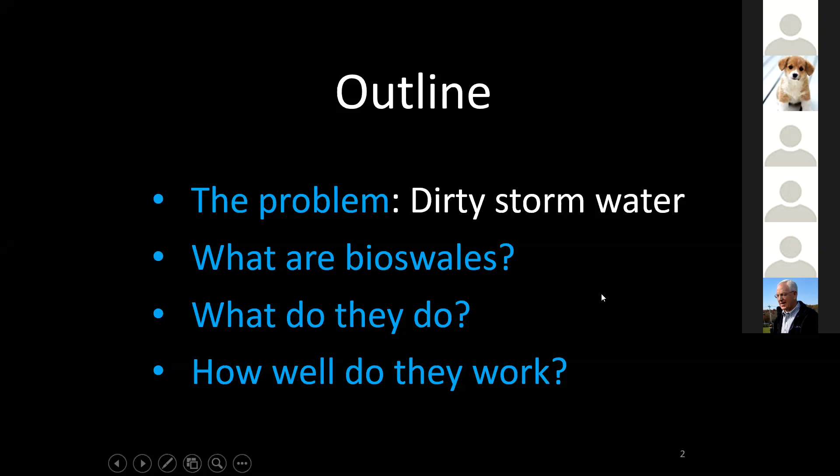Here's what we're going to be talking about today. 4 things. One is I'm going to outline the problem a little bit, and it's pretty simple. It's that we have a lot of dirty stormwater, but I'll tell you a little bit about the background of that. And then we're going to be talking about bioswales, and I think once I show you a picture, you'll realize that you've seen them around town. Matt's been building them everywhere, but I want to dig into that a little bit, and then tell you also about what it is that they do. They're not just beautiful gardens, they actually have an important function.

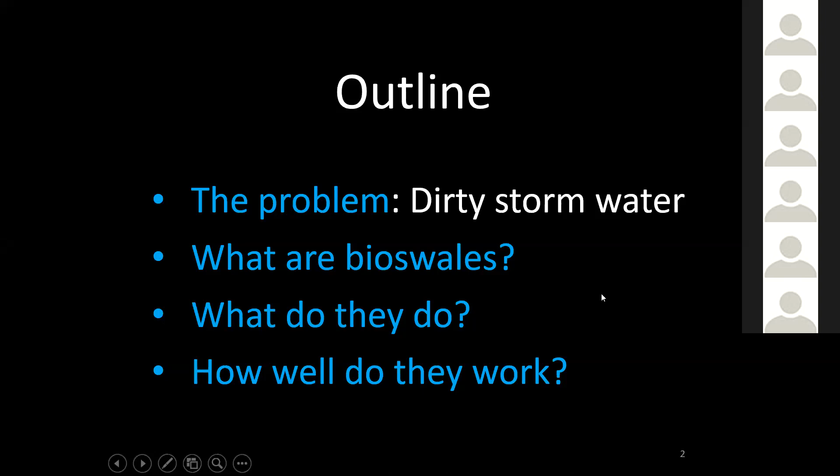And then I'll finish up with the research that I've been doing, which is to try to figure out how well they work. We kind of assume that they work, but it's good to know that for sure and put numbers on it. So the problem, here's images of, on the left you see kind of an undeveloped area, forest. If you have a building, it's got a green roof, and when it rains, water behaves the way that it likes to in forested systems, which is that it filters into the ground.

And some of it also evaporates either passively or by the actions of plants up into the sky. And so most of the water is being dealt with through these natural pathways. In a city, you have a system of pipes and catch basins and things. That's called gray infrastructure. I'll show you some more about that later.

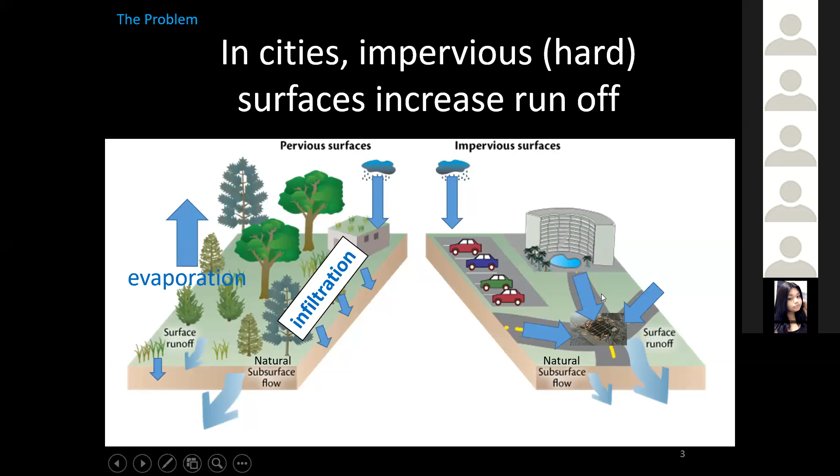And the water runs off those hard surfaces, roads, roofs, parking lots, sidewalks, all that stuff, and it goes down into the subsurface where we don't see it anymore, but it's down there. And I'll talk about that in a minute as well. And the outcome is that in a kind of a natural, undeveloped, more rural system, most of the water is getting into the groundwater system and receives natural treatment. I'll bring us to that point too.

Whereas in a city, most of it, before we had these bioswales, is going into a series of pipes underground, and then it flows very quickly into the nearest water body, okay? And usually receiving essentially no treatment at all. So we're just taking that dirty water off the streets, and it's going into nearby streams and rivers.

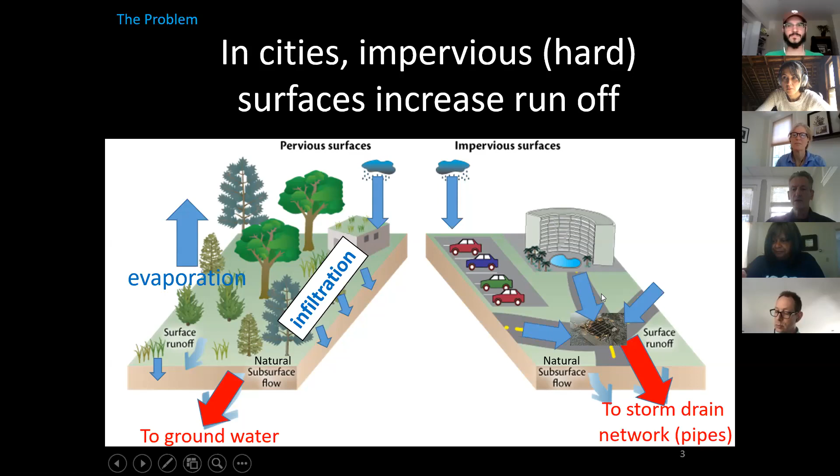And along the way, as it's flowing over these hard surfaces, it picks up all sorts of chemicals that you may not be thinking about very much, but they're there. So people add pesticides and fertilizers to their lawns. Out in the road, they salt, and that's a picture I took this winter. That's a heap of salt there in the middle. It's almost like one of those speed bumps.

It was so big. Or in parking lots and gas stations and so forth, things drip off of cars and you get all that oil. And when the rain comes, it washes all of that crud down into the storm drain network and into your nearest favorite stream or pond. That's not good.

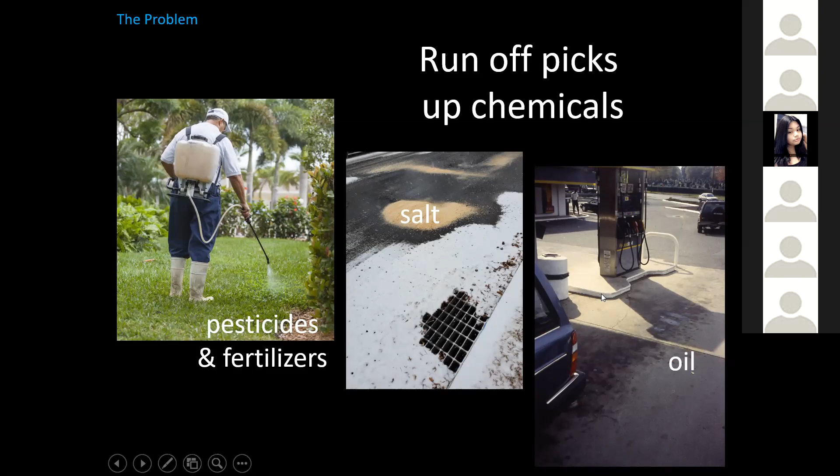So you've seen these catch basins all over the city. They don't go nowhere. They go actually to a set of pipes, as I mentioned. And we can't see those pipes, which is intentional, but it's also bad in the sense that it makes us kind of unaware of the problem. We feel water goes into that catch basin and it's gone, but it's not.

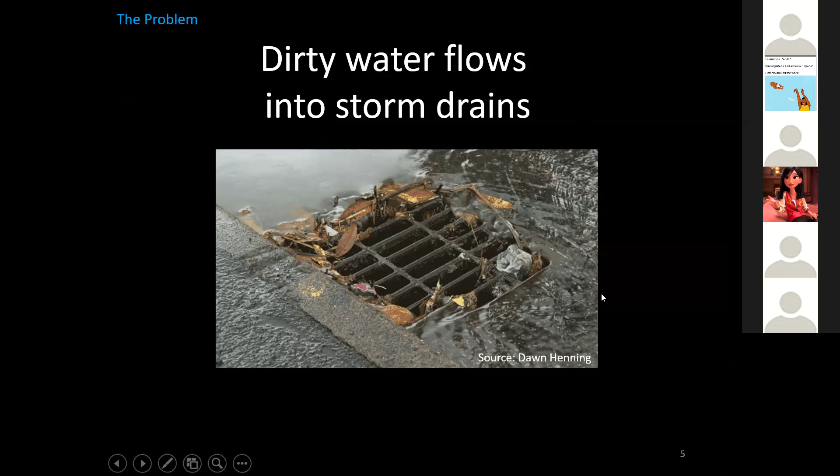Indeed, it's flowing to some nearby originally clean water body, and this is a picture of a research site of one of my doctoral students a few years ago. I don't know if it's crystal clear, but the water that's coming towards us from upstream underneath that bridge is clear, and then the water coming out of the pipe, out of the storm drain network, is really filthy, and you can just see it.

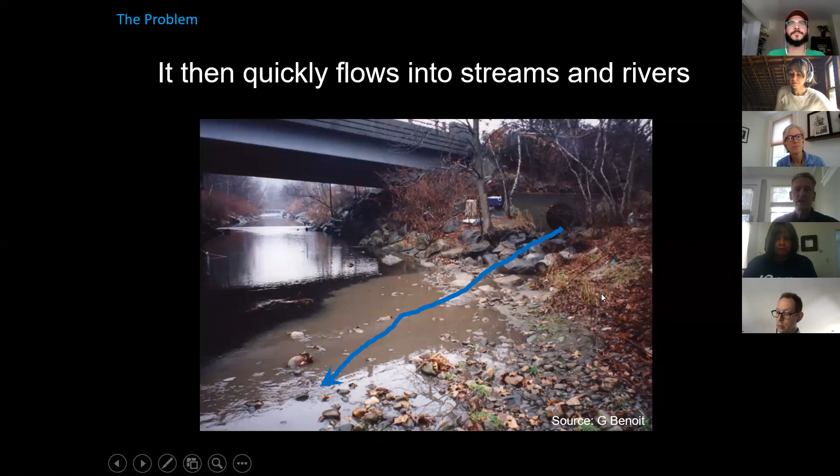It's that brown mess, and that brown is not just soil dirt particles, it's also carrying a lot of those chemicals that I showed you in the previous slide, so that's not a good thing. And that, believe it or not, that's the best case, okay? So the set of pipes under the city can come in two different varieties.

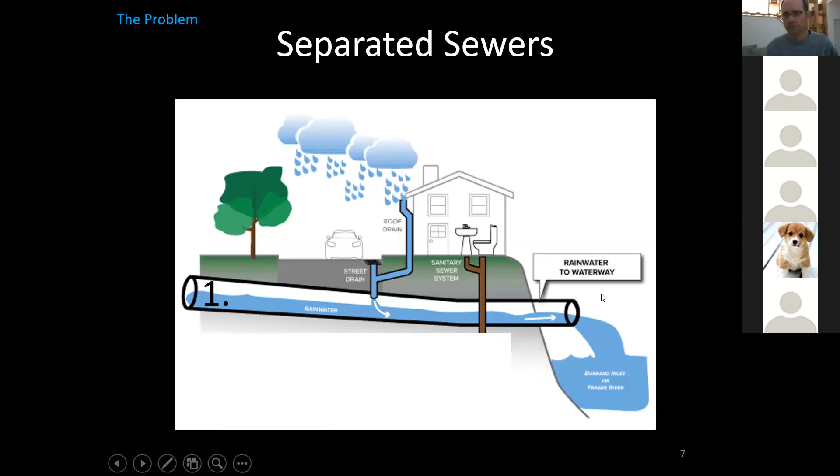One is so-called separated sewers, and you'll see I have the number 1 there indicating a single pipe. And water from the streets, on the left there, the blue water is flowing into that pipe, and then it's going into the nearby water body, but it's picked up chemicals, so maybe it shouldn't be blue, maybe it should be brown. But then so there's the flow.

But then there's this other set of pipes that we have, so that sewage coming from houses, toilets, sinks, washing machines, and so forth, goes to the sewage treatment plant where it gets treated, fortunately. And this is the way that modern cities are built, and the newer parts of the city of New Haven.

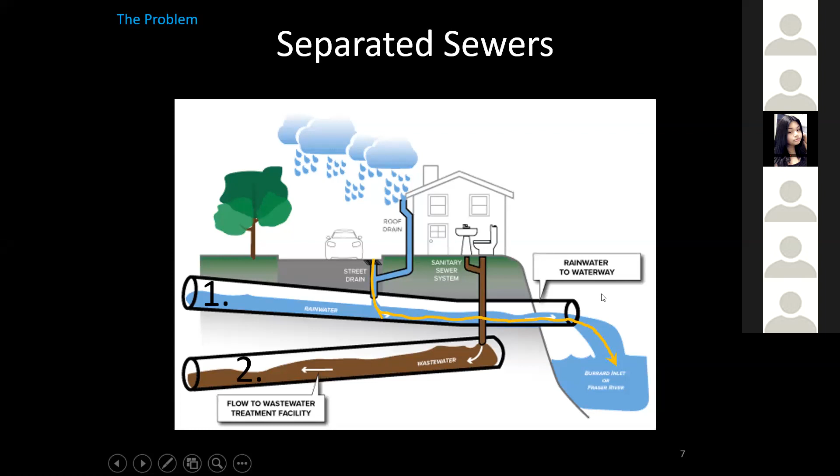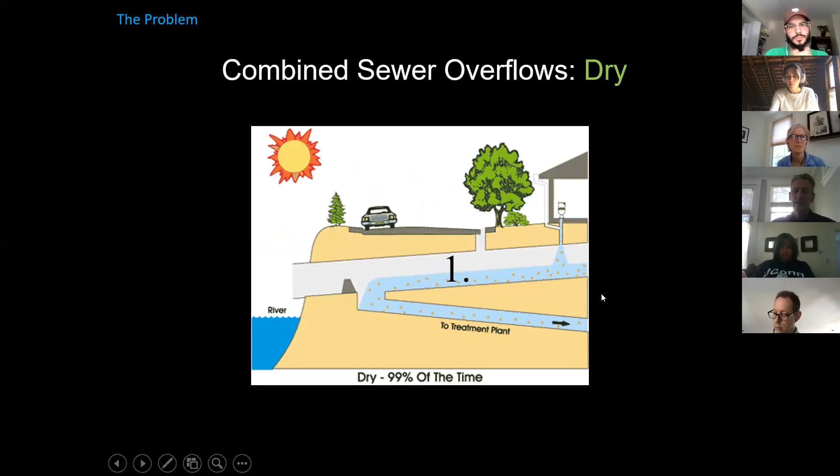But older cities and older parts of cities tend to have a single pipe, one big pipe, and it's receiving water. Here, the sun's out, it's dry conditions, there's no rain. And all of the water from the house is going, fortunately, to the sewage treatment plant. However, then it rains. There's the water going to the sewage treatment plant.

Then it rains, and the water that comes off the street goes into the catch basin, flows down into that same pipe as the raw sewage. And that mixture of those two things exceeds the capacity of the pipe system and of the sewage treatment plant.

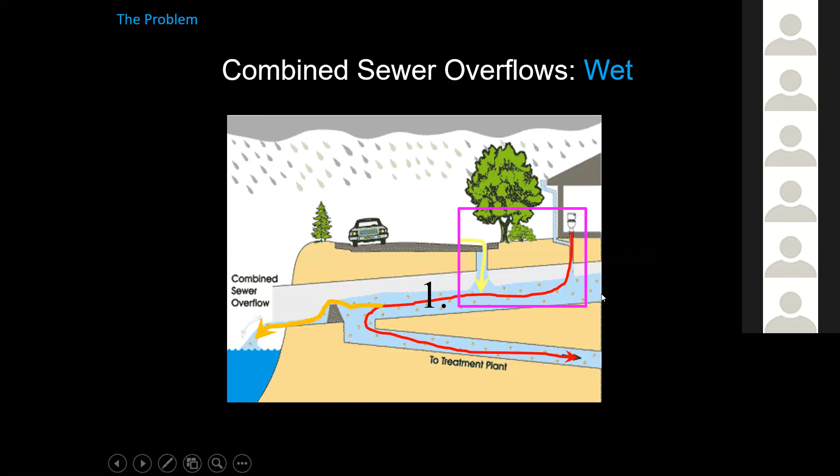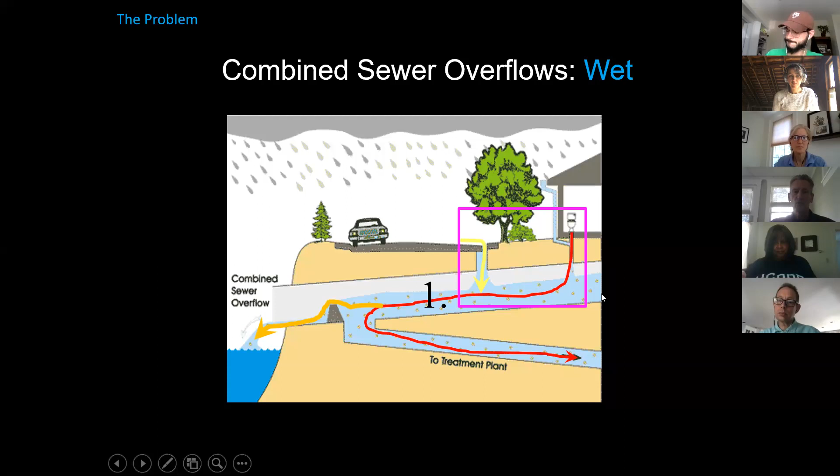And that mixture of raw sewage and street runoff, neither of which is clean, is going into nearby water bodies. And that's the worst possible scenario. In either case, the dirty water from the street can end up in otherwise clean receiving water bodies. And obviously that's something that we don't want.

So that's the problem. Let's talk a little bit about what bioswales are, and that gets into a bigger question of so-called green versus gray infrastructure. And infrastructure is just the fancy word for the things that we build, and it can include these pipes and things that I've talked about, but infrastructure also includes bridges and roads and all of that stuff as well. But let's stick with the pipes.

So gray infrastructure, and I'm showing you some pictures on the left, is all of this stuff that's underground. All we see is the grates where the water enters, but then you have pipes and chambers, all of this concrete, which is expensive. Expensive to buy it, but it's also, you can imagine, very expensive to install because you have to dig up the street, close the street down in order to put this stuff down there. And eventually it wears out and you have to replace it.

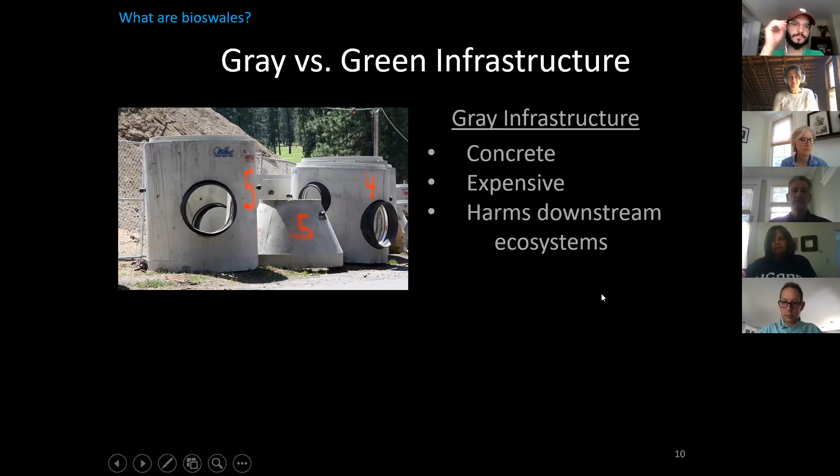And as we've seen in the previous slides, the water flowing through this gray infrastructure is likely to harm the ecosystem, right? Instead, increasingly, we decided to work with nature with so-called green infrastructure. And instead of concrete, now we have plants and soils and stones and natural materials like that. And the great thing about green infrastructure is it's not only cheaper to install and maintain, but it's also environmentally beneficial, both because it reduces the downstream harm, but looking at the system on the right, it's aesthetically beautiful.

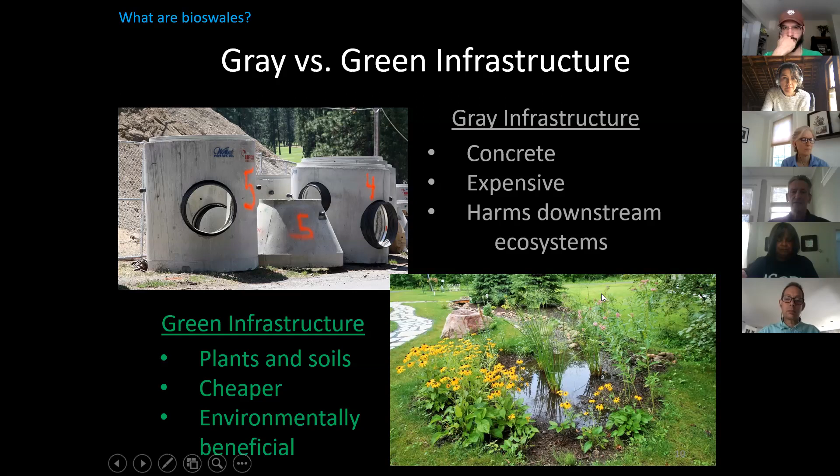It's habitat for frogs and things, I'm sure. It purifies the air, it reduces the local temperature in the summertime, so it has lots of great benefits. You sort of wonder, why didn't we think of this earlier? And here are some of the things.

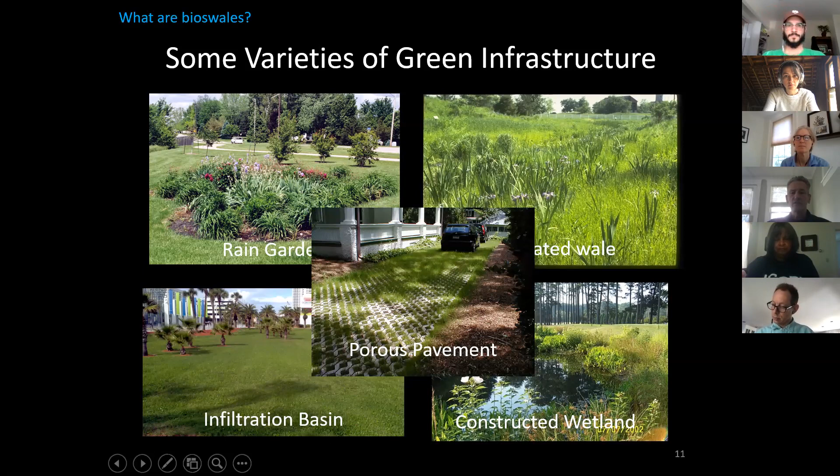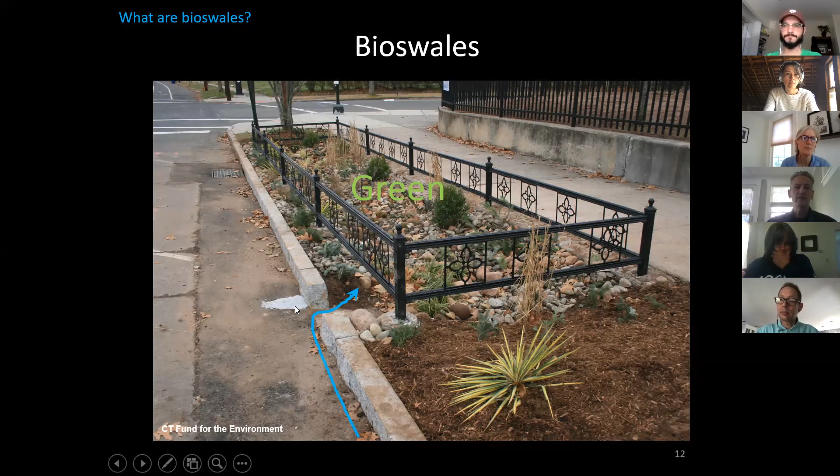When it rains, water runs down the street, enters that curb cut right here. There's also this little ridge here to keep water from flowing past it. And I'll show you a picture later where you can actually see that thing functions. And you have this green infrastructure. And what we're doing is we're bypassing the gray infrastructure.

These things are always situated close to one of these catch basin inlets where the water would go into the pipe. Once we build this, we don't dig the pipes up or anything. They're still there as kind of a backup in case you have exceptionally high flows that exceed the capacity of the bioswales. But so far, monitoring lots of events, that rarely happens. So they're working very well, and I'll give you some details of that a little bit later.

Here's a kind of a cross section, because here all you're seeing is what you get when you're walking on the street and you see it at the surface. But there's a lot below ground, as Matt can tell you. They dig down 4 feet. When they're in there, it looks like it's over their heads almost. It's so far down, and then they put in.

At the bottom, they put in stone, which has a lot of void space between the stone, so water can sit down there if it needs to. And above that, there's the soil that the plants can grow on. And there's some other details as well, but they're, I think, beyond our need to discuss right here.

But the other thing that you see is that this then leads to the natural subsoil. The entire city, even where you see buildings and roads and so forth, underneath all of that, there's still soil. So water coming down the street gets into the bioswale, it filters down, infiltrates, as we say, and eventually can get into the natural subsoil. And there's a lot of good things that happen down there. I'll show you a list of those in a second.

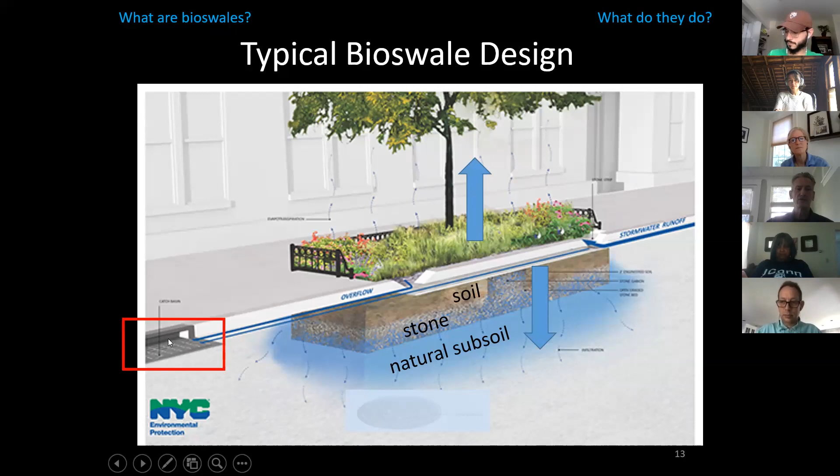And this is also going from what a bioswale is to what they do. I'm talking a little bit already about the function. So water that's flowed down the street goes through this curb cut into the bioswale. Some of it can evaporate up into the atmosphere, and some of it can filter down into the soils down below. And the main thing is it's not getting into the gray infrastructure, the pipes and so forth that lead directly to nearby waters that they could be polluting. Here's another image that I think

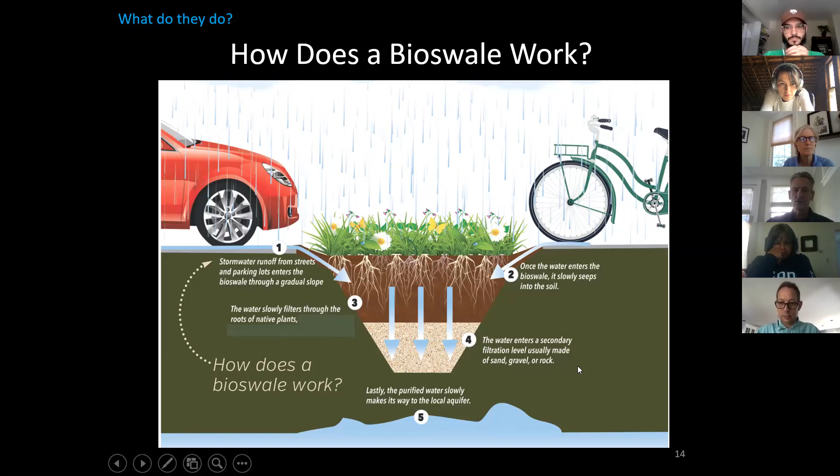ideas, and you can kind of go through this in order from 1 to 5. But the notion is, again, water running down the street flows into the bioswale, it passes slowly through the soil, and then if it needs to, it can accumulate in this gravelly part down below. And from both of those locations, it seeps out finally into the soil subsurface. And the thing that we have to be aware of is we tend to focus on the bioswale itself, but once the water gets out of the bioswale, a lot of purification takes place.

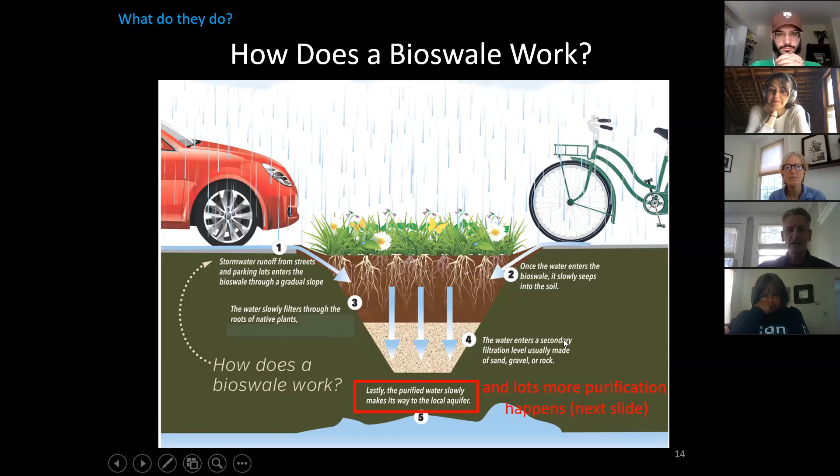And the next slide might be overwhelming, but I'm going to show it anyway. Here's what happens, both to some extent in the soils in the bioswale, but also when the water gets out of the bioswale into the natural surrounding soils. And don't worry, we're not going to talk about this. In my college level class, we discussed this for at least a week, all of these different processes that take place. But the point is, there's a lot going on, right? There's a lot of physical and biological processes that take all those contaminants that I listed in an earlier slide, and it reduces them so that the water, once it finally slowly reaches a nearby stream or lake, has received a lot of purification. And if you want to ask questions about this later, happy to discuss any of these processes.

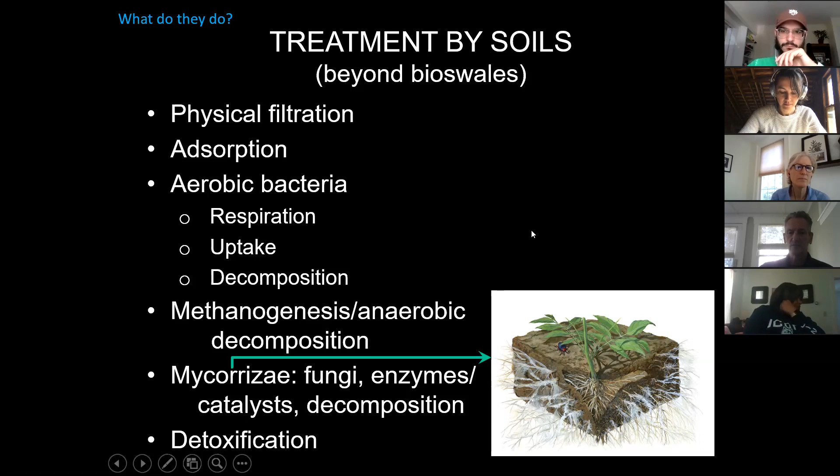This is just a picture of kind of an artist's rendition of a cutaway of the soil, and it shows this really interesting zone called the rhizosphere, which is the plant roots in association with fungi, and a lot of interesting biological and chemical processes and reactions take place there. It's really an amazing part of the system that we really don't think about, but it's very important.

And just to give you a sense of that, this is kind of a blow up of downtown, and you can see the green, these 2 squares right here, and then all of these neighborhoods around it. And what we're looking at are 2 so-called sewer sheds, which are areas of land that drain to a point. And here's essentially the flow path. There's a huge pipe that runs down Elm Street and Chapel Street. They end up down here, and the pipes down here are 7 feet across when you go down to the subsurface and look at them.

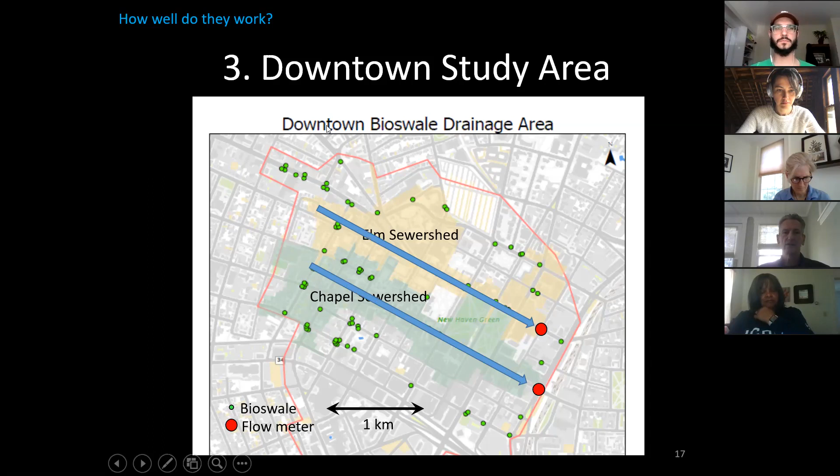And all of these little green dots are these bioswales, similar to the one that I showed you a picture of before, a little bit smaller, but essentially the same thing. And water from each of these is connected to... the ordinary flow without the bioswales would be through a series of catch basins and pipes to this central main culvert that would flow to these 2 points. This is the third of the 3 locations, endpoints of these 2 sewer sheds.

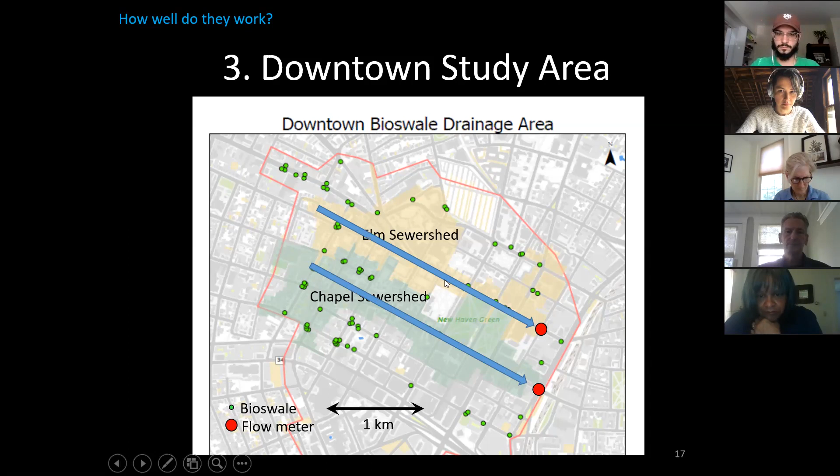And the scales of the research varied. In the beginning, we were very modest. We only had 7 bioswales installed in a couple block area. And in that region, you have small pipes. But as I said, downtown, you had these huge pipes. I wish I had had someone in the pipe for scale. 7 feet across. I'm pretty tall, but I can stand erect. And it's impressive when you go down below the street and you see the huge pipes that are down there.

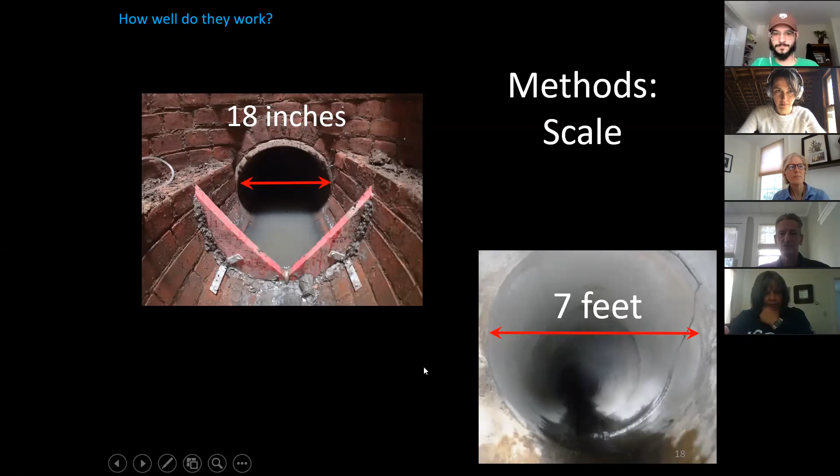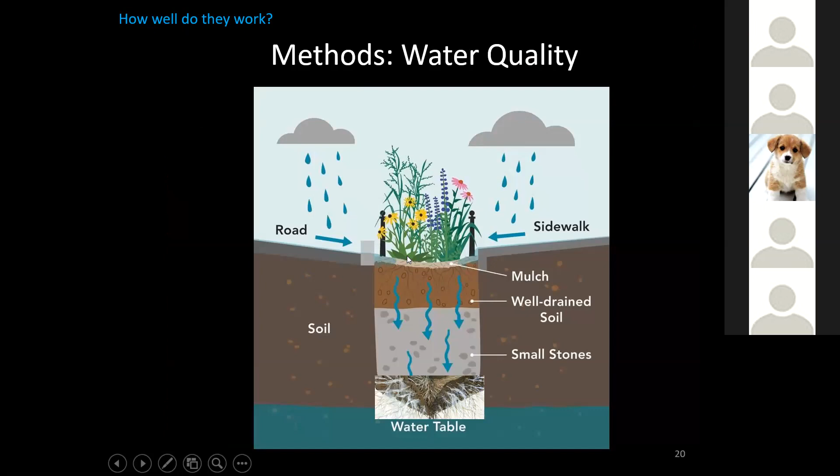The methods that we used are, we do 2 kinds of measurements. One is to look at individual bioswales, and here's one kind of in cross section. And we measure water in the street and water at the bottom of the bioswale, and by seeing how much cleaner the water is at the bottom of the bioswale than on the street, we can get a good calculation estimate of the amount of pollution that's being removed.

And the only unfortunate thing is we're not able to go into the soils away from the bioswale and measure water quality there, which would be even better because of, remember, the rhizosphere and all of those processes that are taking place. I mean, it's not completely impossible. If we were to sink a well or something, you could do it, but that's actually a very expensive and difficult process, especially in an urban area. So, so far we haven't done that. Maybe something we would do in the future.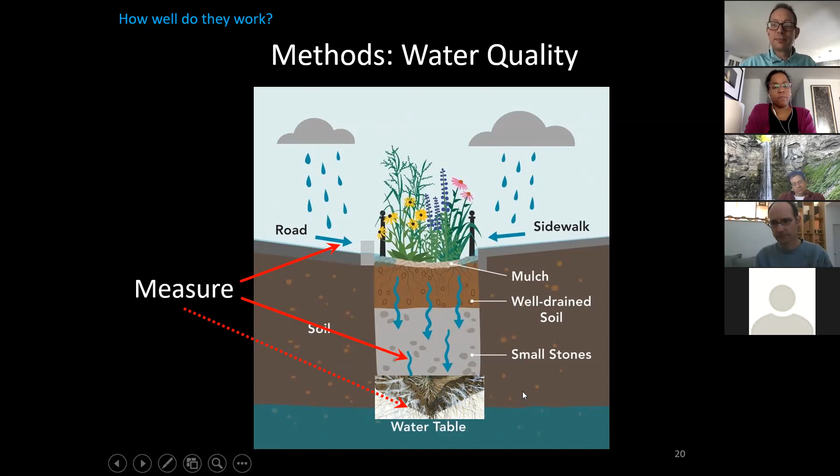But again, you see water from the road gets into the bioswale, filters down through the soil and rock, and gets cleaned by natural processes, all for free. No energy goes into this, no chemicals go into this, there's no moving parts. It's really wonderful. And on the water quality side, during storms, we collect series of samples. This is a special kind of sampler with these bottles. We bring those back to the laboratory. We measure them with our expensive equipment. We measure rain and so forth, and we know kind of all the parts of the system.

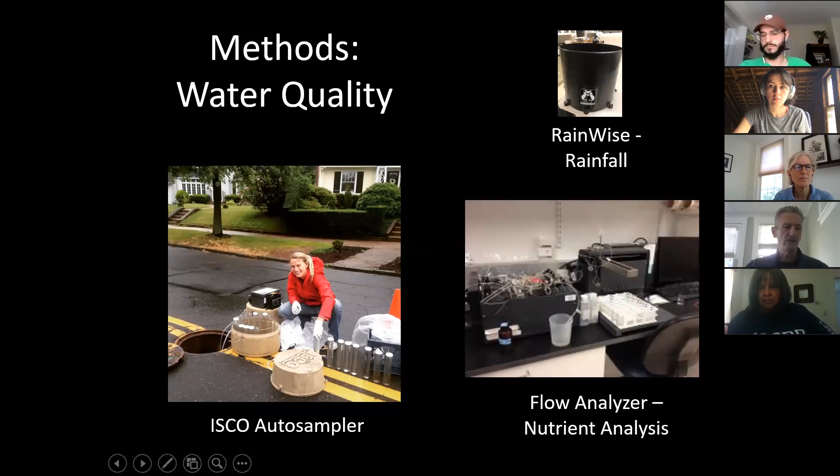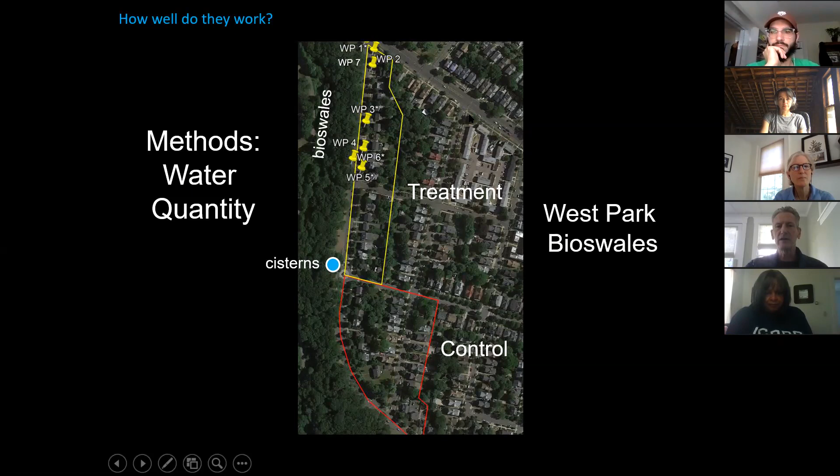That's for individual systems. We also look, as I mentioned, at a much larger scale. And so for trying to understand water quantity, you want to reduce the quantity as well, because that can cause flooding, right? I've been talking mainly about pollution, but there's also a flooding issue here. Then we can compare two kind of neighborhood scale sewer sheds. In this case, a couple of blocks. This is where we installed 7 bioswales, and in addition, there's a thing called a cistern that I won't get into, but it's another kind of green infrastructure.

And then we compare that to an adjacent neighborhood, which is very similar in almost all ways, except that it doesn't have any of these green infrastructure implementations in it. And then afterwards, we can say, how does the system behave that has not received any green infrastructure, any bioswales, and how does the other one behave? And that's the couple of slides I'm going to show you next, what they demonstrate. Oh, sorry.

I'm doing okay for time, so I'll just mention, for measuring flows, we have a bunch of different methods. We install these things called V-notch weirs down in the sewage pipes. This is raw sewage, pretty yucky stuff. I like it when I don't have to measure that, and I have not been in recent years, but we did it in the past. There's special kinds of flow meters. There's these funny tipping bucket things. We have mini flumes, and we have different methods, all for measuring the water flow. And again, comparing a system which has been treated with bioswales and one which has not.

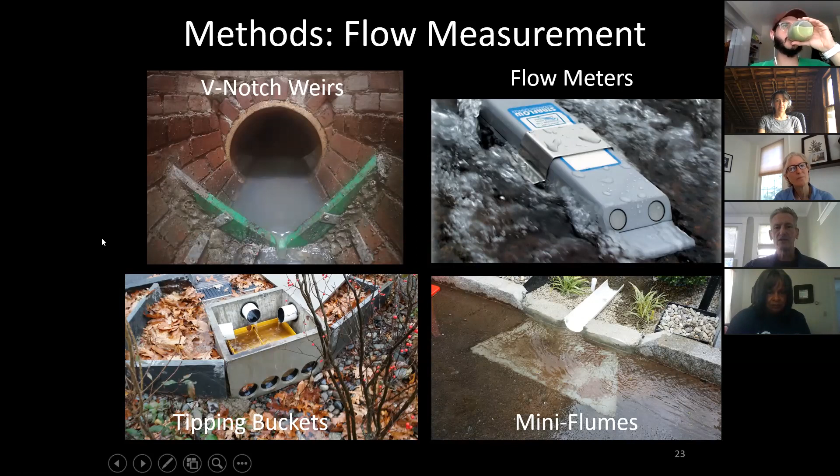And so here's the results. I'm just going to show you 2 slides. I could show you dozens of these, but I think 2 make 90% of the point. Here we're looking at flow. Okay, reducing flow is good because the flow is dirty, and so every gallon of water that you keep from going directly into a nearby pond or stream, the better it is. But as I said, it can also reduce flooding.

And one of the main reasons that the city is interested in this is that downtown area where Matt's been working in the last couple of years, all of that water is flowing over to near the train station. And if you've been out there during a big rainstorm, you'll see that the streets get totally flooded.

And so if we can divert that water, get it into the subsurface where it flows very gradually to nearby streams and rivers, it's much better. And this is a very complicated figure, and I have a minute or two, so let me explain it a little bit. So there's a lot of things plotted. You see these, I don't know if it shows up well on your screen or not, these little gray bars are telling us the amount of rainfall.

Okay, so we measure the amount of rain, and what you're seeing is that rain increases, it decreases, there's two increases, and when that happens, the amount of flow, which is on this scale over here, also goes up. Okay, so with those devices that I just showed you, we're measuring the amount of water that's flowing, and when the rain increases, the flow in the pipes increases. And what we're doing is we're measuring that control system.

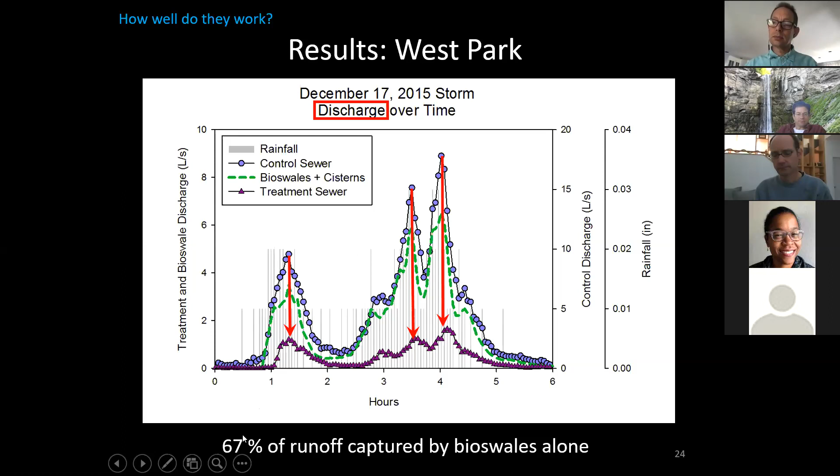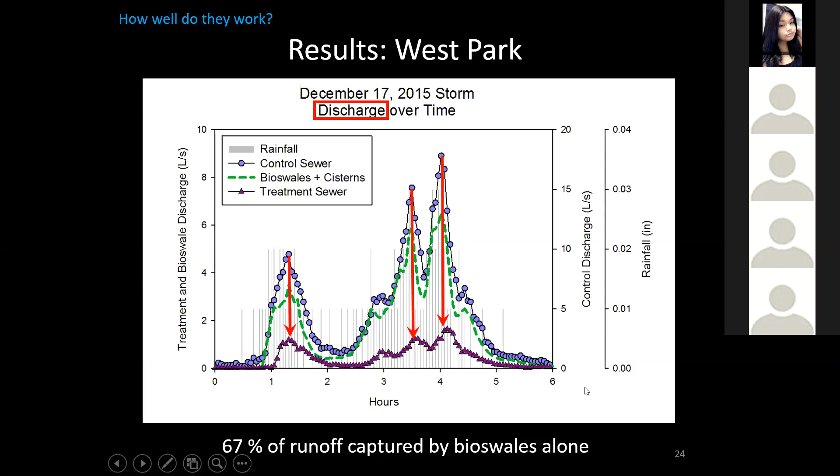And depending on the storm and how you do the counting, it's frequently the vast majority of it. It can be 60, 70, 80% of the water that we're successfully removing from the pipes and instead putting into the deep soil where it gets processed well, purified, and doesn't quickly go and cause flooding at the same time. So that's the amount of flow.

Similar results when you look at pollution, so looking at water quality. We measured several things, including metals and nutrients that cause eutrophic algae bloom, stuff like that. But here's just one slide looking at copper. And the copper, again, the blue dots are the watershed that has no bioswales in it, and the purple dots are the one that does. And the scale

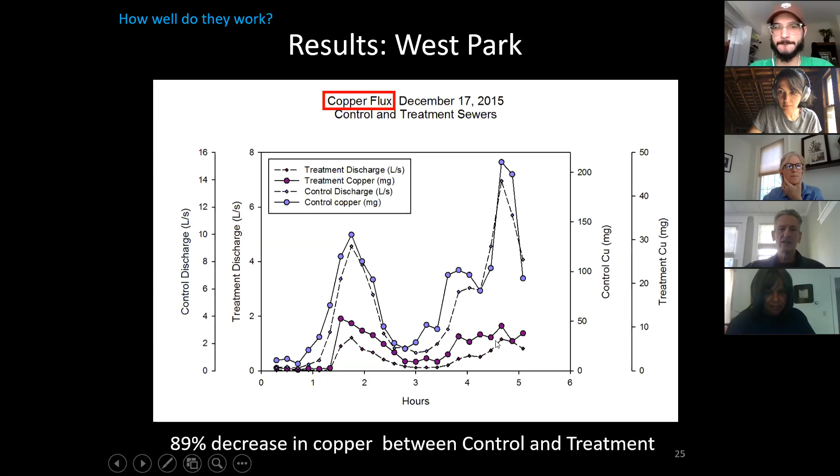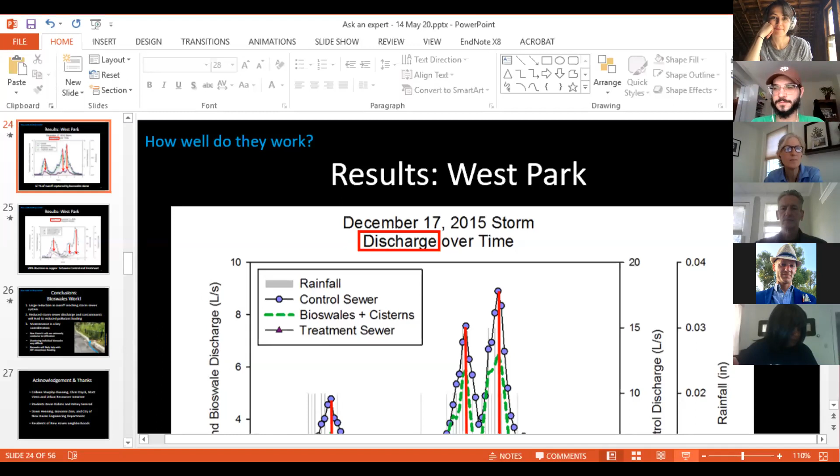Looks like we might have lost Gabe. Yeah, it seems like maybe his computer has frozen up. He's still online with us, but we don't hear him at the moment. Let's give him a second here. Okay. We can see you. Okay, but we don't see your slides right now, though. Oh, okay. Let me try to do the, that's annoying. And now? Yeah, we're just looking at the regular PowerPoint. It's not the same format you had it before, but we can see the slide. How about that? That's great. Yes, perfect. Okay, sorry about that.

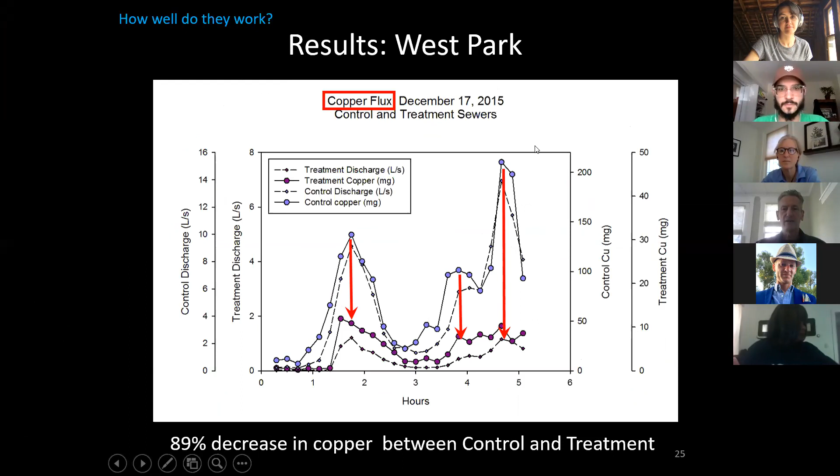So the point I was making is that, sorry, this is the next slide, that under all conditions, you're getting a lot less copper in the treatment system with the bioswales than in the watershed without them. So that's a great success story. As I said, I have a lot more data, but I think that those two slides kind of make the point. And that brings us to essentially the end of the talk and my conclusions, which is that bioswales really do work. And they work whether we're thinking about volume of water and the flow, or whether we're thinking in terms of the pollution.